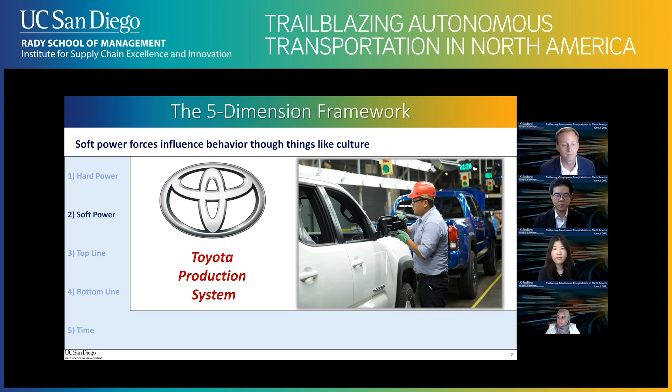The third dimension is top line. Top line forces deal with revenues, for example, the factors that drive vehicle demand. The fourth dimension is bottom line. Bottom line forces deal with supplier capabilities, for example, manufacturing costs.

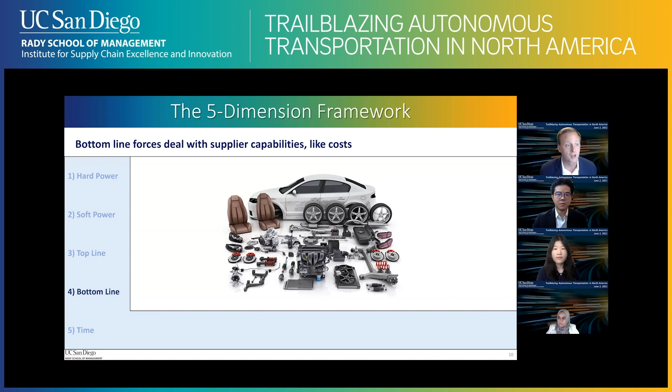Finally, the last dimension is time. Industries are kept in balance by the previously listed forces that drive its direction over time. For example, here, the Ford Model T won market share in the early 20th century by its innovative assembly line operations focused on cutting bottom line costs.

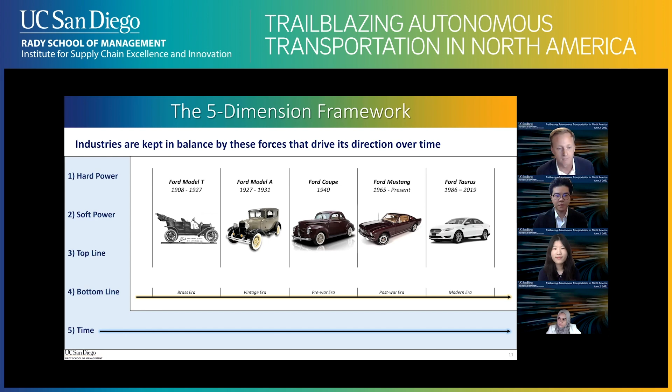As much as we all like the Mustang, it was the Ford Taurus that saved Ford from impending bankruptcy in 1985 as top-line demand shifted from boxy American cars to smaller and more fuel-efficient Japanese import styles. Throughout this entire timeline, eras come and go due in part to the hard and soft power shifts that we experience. This first section of our presentation will focus on the internal combustion engine.

Society has come a long way since the first modern internal combustion engine was invented by Nicolaus Otto in 1876, shown here on the left-hand side of the screen. This technology has grown to some of the most modern internal combustion engines of today, shown on the right, like Infiniti's 2-liter variable compression turbocharged engine.

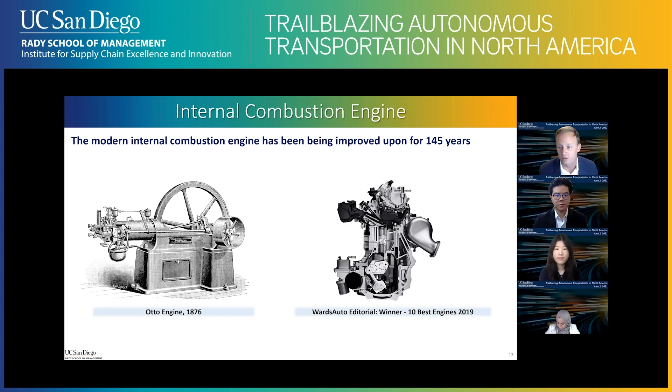There are many factors that brought us from the engine on the left to the engine on the right that powers the automobiles that we know and love today. We view our first factor as hard power. Hard power regulations have aimed to influence consumer and automaker behaviors.

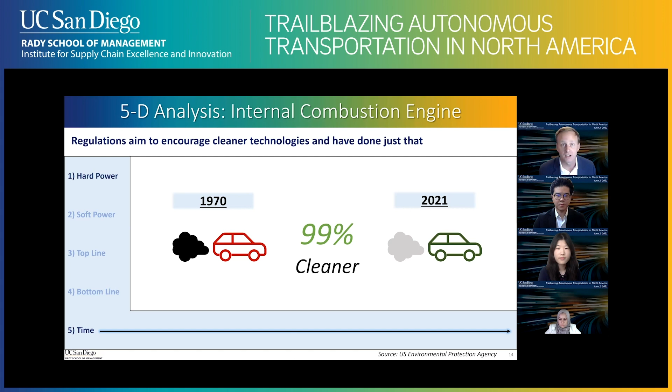The Clean Air Act, passed by Congress in 1970, gave the Environmental Protection Agency the legal authority to regulate pollution from cars by adopting stringent standards. This has resulted in new cars, trucks, and SUVs being 99% cleaner than their 1970 counterparts, according to the EPA. In fact, a substantial jump is evident in just 10 years' time, as demonstrated here.

On the left-hand side of the screen, you will see the 2008 Ford F-150, its engine, and its engine specifications. On the right, we see the 2019 counterpart. Over time, companies like Ford have innovated to produce significantly improved engines powering their most fuel-inefficient vehicles through hard powers like the EPA Clean Air Act.

Over a period of 10 years' time, the F-150 has shifted from a normal V6 engine to their EcoBoost twin-turbo V6. The newer engine has drastically lower displacement, which leads to an increase in fuel efficiency, as shown by these green boxes and lines. Better yet, both horsepower and torque have increased, as shown by these orange boxes.

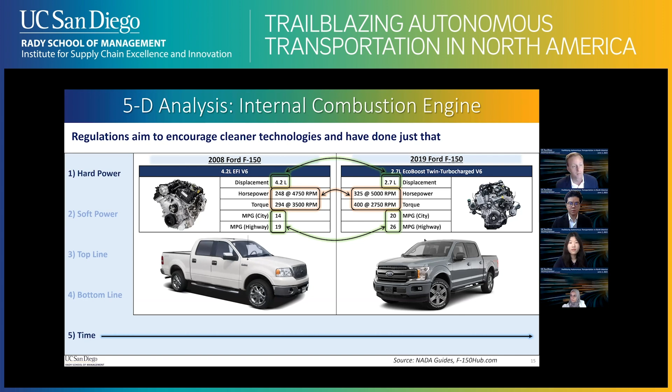In regards to soft power forces driving the automotive industry, companies have curbed their investment in new internal combustion engines, essentially only maintaining this powertrain as a bridge into a more environmentally friendly future. Just this year, as demonstrated in this non-exhaustive list, we see spokespeople from companies across the industry reinforcing that they are withdrawing funding from new internal combustion projects and investing heavily in cleaner technologies. These automakers are just a few, joining the ranks of companies like Toyota and Honda, who stated their planned exit from the internal combustion market in previous years.

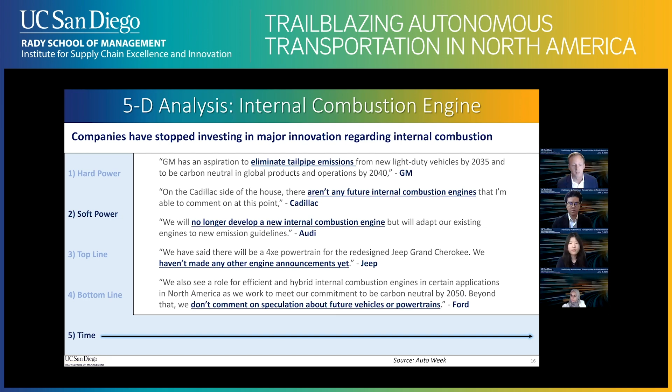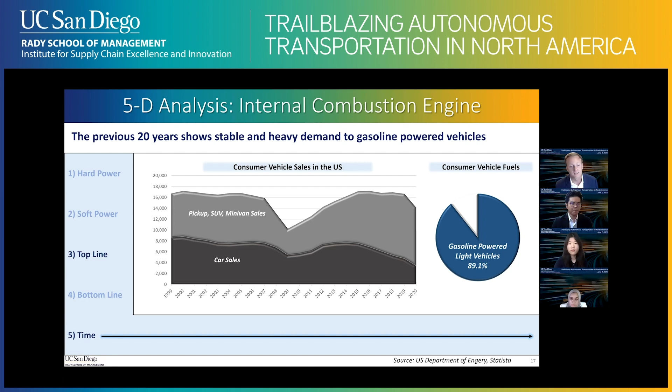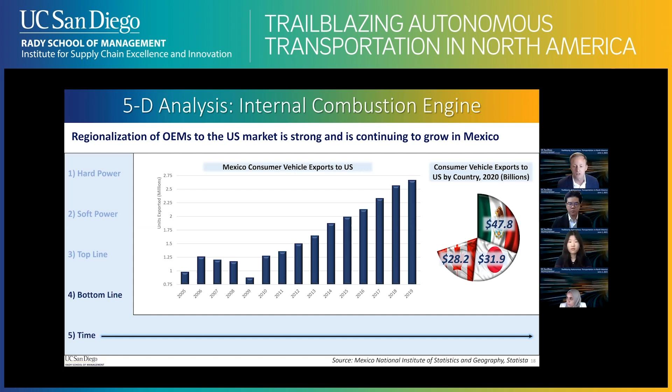I will now turn it over to Nora to walk us through with a detailed look at the EV industry.

Thank you, Dan. In efforts to reduce pollutants and greenhouse gases, alternative or renewable energy sources have shown great promise in helping to reduce the number of toxins that are byproducts of energy use, such as ethanol, natural gas, hydrogen, electricity, propane, and biodiesel. Lots of regulations are emerging in North America to achieve these efforts.

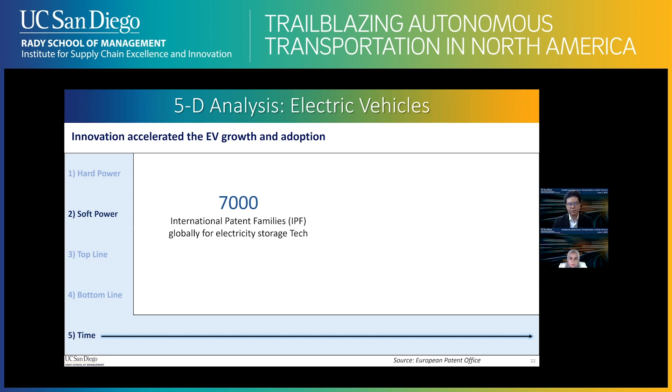In terms of soft power, the innovation in the industry has been on an upward trajectory. There were 7,000 international patent families related to electricity storage published globally in 2018, with an annual growth of 14% between 2005 and 2018, compared with a 3.5% annual growth rate on average for all technology areas. The US has been seeing an increase in filed patents and is right behind South Asian countries and Europe with more than 870 patents in 2018.

The increase in innovation in electricity storage introduced more attractive models to the market that meet the customer's demand and accelerated the adoption of EVs.

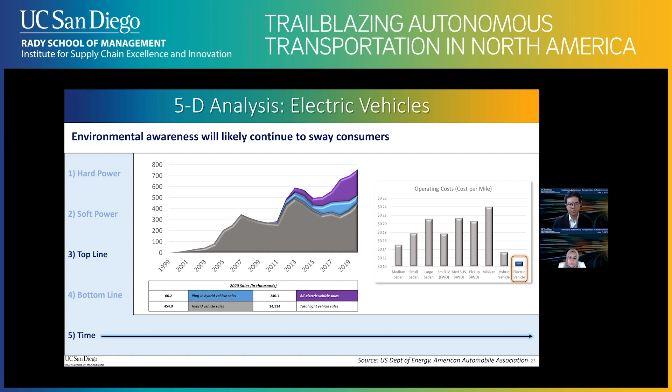On the top line dimension, the graph on the left shows the increase in sales of EVs since 2016. Sales in the US increased by 80% in 2018 alone. Moving to the right side graph, the lower operating cost, which includes the cost of fuel and the cost of maintenance, attracts many customers to the EV regardless of the tag price. The increase in sales was also driven by the fact that manufacturers have been competing in introducing high-performing EVs to the market.

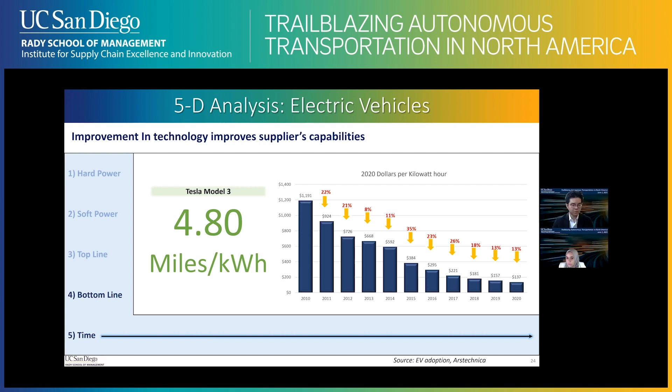The improvement in the supplier's capability, or the bottom line, is driven by the improvement in soft power, and will improve the top line in the long run.

Now, regardless of the growth that we see in the EV industry, there are challenges that need to be addressed. Based on our research and interviews with experts in the industry, we highlighted three main challenges: batteries, cost, and infrastructure.

Starting with batteries, one crucial challenge is that cell demand growth is outweighing cell supply. Automakers are now competing for a limited supply of cells. We need to scale up production, which means more raw materials, skilled talent, machines to extract raw materials, and factories to process these raw materials.

In terms of cost, raw material mining cost is a challenge. Lots of auto manufacturers are investing in battery technologies, however bringing the whole process locally is costly. Today, battery technology is dominated by lithium and nickel. The issue with lithium is economic shortage, meaning lithium prices don't support the mining investment required to get it out of the ground profitably. As for nickel, the challenge is in the refinement process, which is cheaper in Asia than in North America or Europe.

Lastly, in terms of infrastructure, charging station availability and grid capacity is a huge challenge. EV sales continue to increase, but EV adoption varies by region, which means planning of charging station demand and upgrading the grid is determined at the local distribution level.

Now, given these challenges, we are still seeing and will be seeing more growth in the industry. With the addition of future technologies, the transformation of the industry is promising. Now I will leave you with Jeremy to share more details about autonomous technologies.

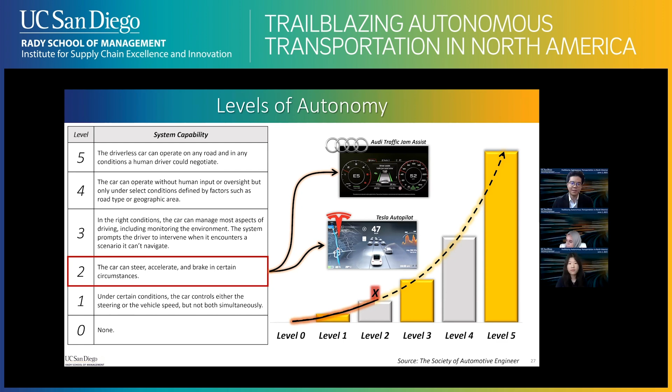Thanks, Nora. For autonomous vehicles, in terms of regulation, the Society of Automotive Engineers defined 6 levels of driving automation, ranging from 0 to 5. These levels have been adopted by the US Department of Transportation, and we're currently at level 2. Examples of the current level include Tesla Autopilot and Audi Traffic Jam Assist.

The autonomous technology has been through 40 years of development. Here are a few milestones that have brought us to where we are today. In 2012, the Google Driverless Car project brought autonomous from lab to commercial. In the years since, Google has developed and tested a fleet of cars and initiated campaigns to demonstrate applications of the technology, for example videos highlighting mobility offered to the blind. Later on, Audi and Toyota both unveiled their AV visions in research programs.

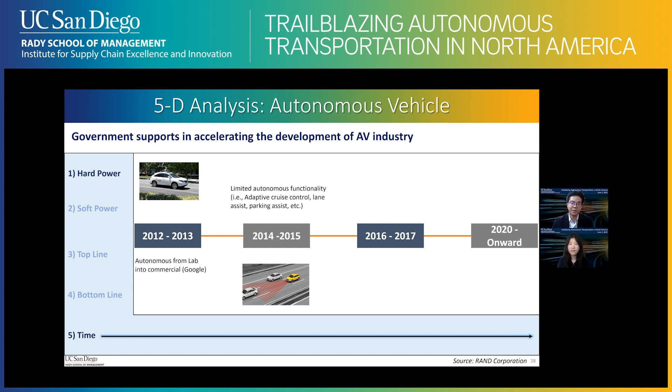During 2014 to 2015, many contemporary car models offered features of limited autonomous functionality, including adaptive cruise control, lane assist, and parking assist. On the government side, in January 2016, the US government unveiled a new policy with a commitment of nearly $4 billion over the next 10 years to accelerate the development and adoption of safe vehicle automation. So far, 50 states have introduced state autonomous vehicle legislation.

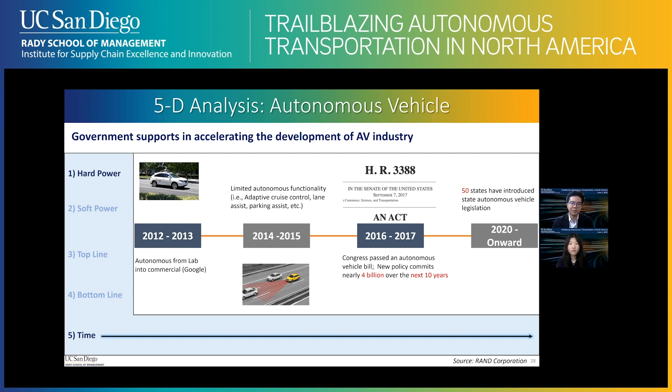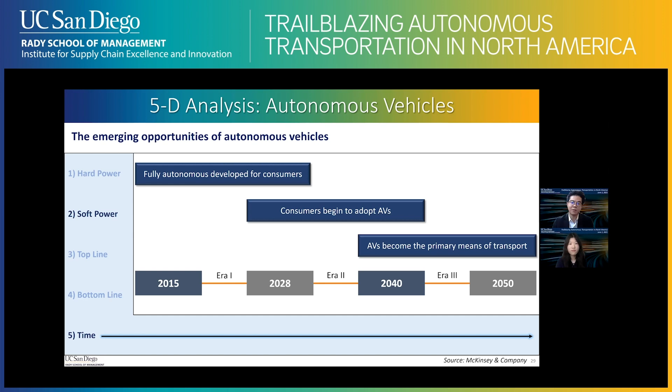On-highway trucks will likely be the first vehicles to feature full technology on public roads, as companies are currently developing the software algorithms needed to handle complex driving situations. Based on our research, the autonomous driving market size will grow from $8 billion in 2016 to $26 billion in 2025. According to the survey, safety, lower fuel, and insurance costs were the top reasons many consumers showed interest in autonomous vehicles. As good as it sounds, cybersecurity and liability are the top concerns for many consumers.

From the supplier side, the B2B market for assistive and autonomous technology, which includes software, hardware, and services sold by suppliers to automakers, promises to be attractive, even in pessimistic scenarios.

The number of autonomous vehicles is likely to remain small for the next 5 to 10 years, even in the most receptive markets. But we do see some opportunities from bottom line. Waymo, GM Cruise, and Uber plan to launch commercial services with autonomous vehicles on a controlled basis. Larger scale driverless services are further off, but investors are betting the shift will come sooner rather than later.

From the bottom line, if we look at the customer cost per mile back in 2019, it ranges from $0.3 per mile for using public transportation to $3.8 per mile for riding with taxi. Ride hail, car sharing, and private vehicle fall between that range. In the future, the customer cost per mile of a robotaxi will be lower than the cost of most other current mobility solutions, ranging from $0.6 to $1.5 per mile.

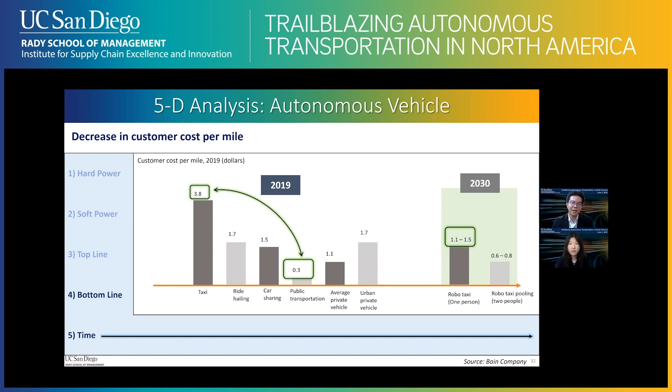So in the near future, autonomous technology will bring us to another level of mobility solutions. And I will pass to my colleague Susan to share more insights on shared mobility and how it will impact our life. Thank you, Jeremy.

We're seeing an increasing number of people moving away from the traditional car ownership model and benefiting from many different mobility services, including ride sourcing like Uber and Lyft, public transit including buses and potentially robotaxi in the future, ride sharing and carpooling, and even the rise of micromobility like scooters.

In the past, getting a car symbolized having freedom. While it still does, we're seeing young adults delaying or not even getting a driver's license. The rate has dropped from 46% to 26% over the last 40 years.

While surveying why young adults are not getting licensed, they quote factors including having a car is too expensive, or that they have the capability to travel through other means, such as public transportation and biking. The combined technology development and the cultural shift has increased the role shared mobility plays.

In this section, we will look at how the overall value supply chain in the auto industry has evolved.

So let's talk a little bit about what goes into an autonomous robot. The first is a great parallel to a human system, because humans are autonomous, right? So first, vehicles need sensor systems. Humans use our eyes, our ears, we have motion sensing in our inner ear. The ability to sense the world around you is really important.

The second is you need computation—the ability to interpret all of that information about the world, classify it, make predictions about how the world is going to evolve over the next few moments, and make decisions about what you want to do next. Then the way you act on those decisions is through actuators, which can be hydraulic or mechanical actuators in a vehicle, or for humans, obviously, our muscles.

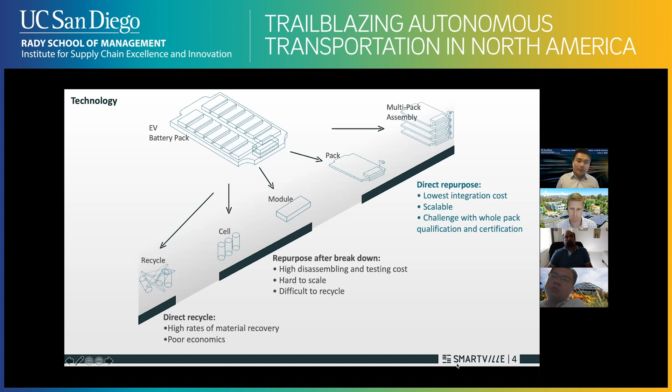But at the same time, it gives an opportunity to aggregate retired electric vehicles at large scale. At the end of their life cycle, we can also sort through them and provide them as a material stream for recycling. So one of the technology solutions we're looking at is to build a distributed hub.

Those hubs can be located anywhere with high EV populations, and we populate those hub facilities to interconnect with the grid. We provide a collection and integration platform for multiple EV makers and models, and we can integrate the battery solutions in those hubs to provide grid energy storage services. Meanwhile, we can qualify those batteries based on their performance, reliability, safety, and consistency, and create a second-use product for commercial and industrial business.

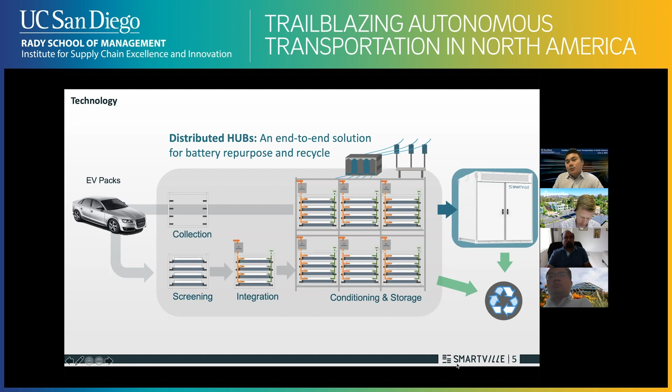And at the end of the day, those hubs can be populated to solve one link of the logistics problem and help aggregate large amounts of batteries, eventually feeding into the stockpile of battery recycling. So with that, I think it's a good transition to Dr. Chen.

Okay, thank you Antonio, and thank you everyone. I'm very glad to speak in this symposium. My name is Zheng Chen. I'm an assistant professor in the NanoEngineering department and the program of Chemical Engineering and Materials Science and Engineering at UC San Diego. I'm going to go very quickly because I was only allowed 2 minutes to introduce the supply chain issues.

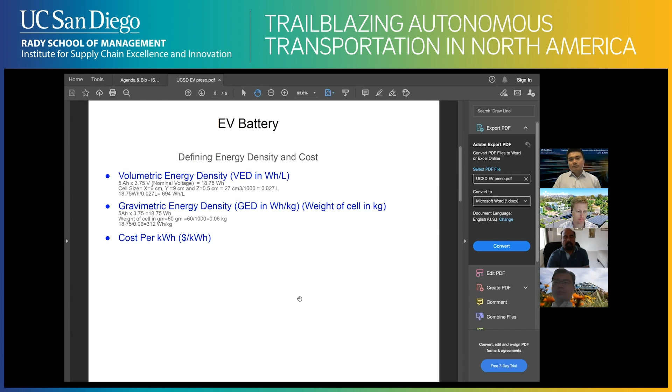Next slide, this is gravimetric energy density in watt hour per kilogram. So how are we advancing? In about 2013, we were at about 154 watt hour per kilogram. By 2024, we will be at 400 watt hour. So it's a significant increase in how much energy we can put in a 1 kilogram weight.

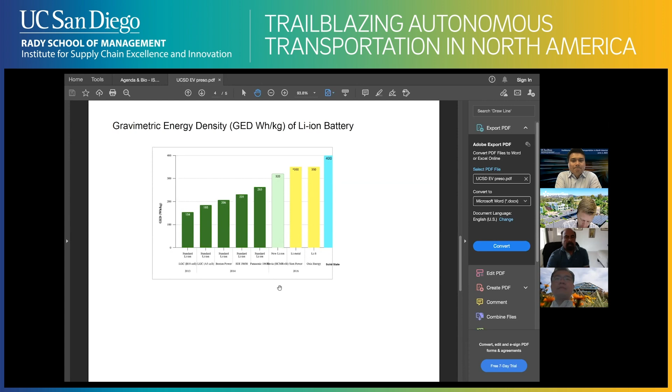And that's where it's going to start making a big difference, because there won't be a cost difference in the cars. So EV probably will take off from there. Right now, the majority of the cost is going into the battery. I think the battery today costs anywhere from $7,000 to $10,000. If the cost per kilowatt hour comes down, and by 2024, 2025 we reach anywhere around $70, $75 a kilowatt hour, we compete very heavily with the gasoline engine car. That's where I believe we will start taking off in terms of EV, because there is no cost difference. There are other things that have to come into play, like charging stations. Like you have a gas station everywhere, so people don't worry about it. Charging stations are going to be critical.

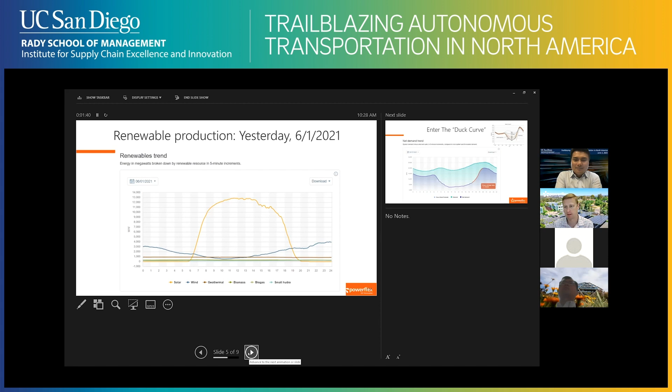But the beauty is you have a very flexible demand function with electric vehicle charging. Some of you may be familiar with this curve called the duck curve. What it shows is after you take out the demand on the electricity grid in California, when you take that solar curve, invert it, and carve it out of that demand curve, you end up with a curve that looks like a duck. It talks like a duck and it walks like a duck.

And it's a really hard problem because as the sun begins to shine, you have to ramp down natural gas resources. As the sun begins to set, you have to ramp those natural gas resources back up. Some of that can be solved with a battery, and we're continuing down that pathway, but it's not the end all be all.

We have to really start converging towards pushing EV charging into the daytime, in California in particular. When we have 5 million electric vehicles, which in theory, from a nameplate standpoint, if they all plugged into a level 2 charger, it would provide 35 gigawatts of power - that's about twice as much as the entire electricity grid. But from an energy standpoint, it's only about 10% of the overall energy consumption on the California grid.

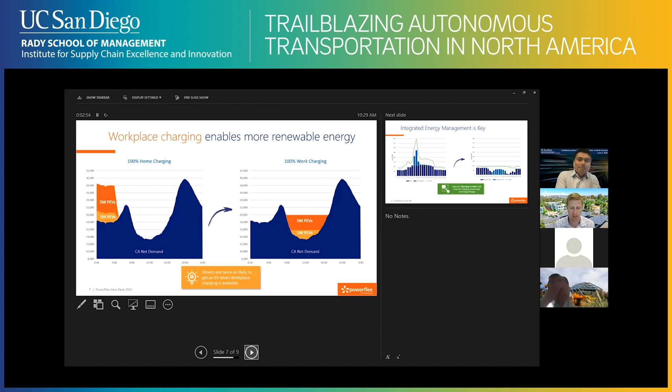So we really have to be cognizant of how we can incorporate and integrate solar, storage, and EV charging. You can see that in the project right behind me at our offices in San Diego, where we have 400 kW of solar, 43 EV charging stations, and a battery. This is actually our load data where we're able to level load all of the energy and power so that we're not negatively impacting the grid.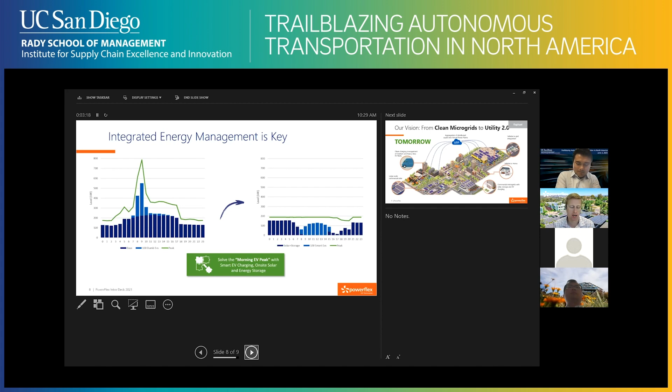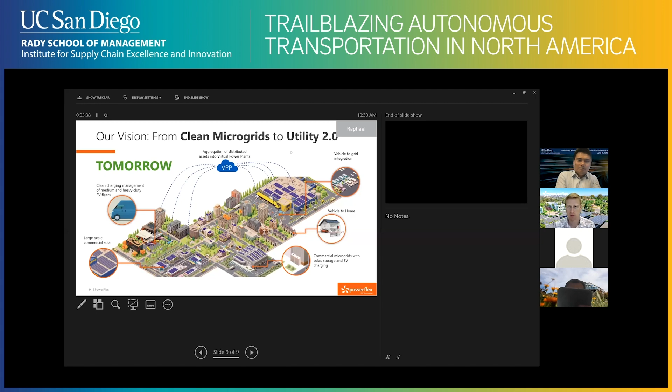Ultimately, this turns into a virtual power plant, microgrid distributed assets that allow, if power is needed on one side, we can distribute that, whether that's through V2G - vehicle to grid, vehicle to home - and regular smart charging as well. So I'll stop at that point and thank you.

So let's move on to a few questions that we have for the panelists. I'll start with the first one: Do you guys think the US battery supply chain, or lack of it, is limiting EV growth?

I think we have a pretty good situation - at least Tesla has done extremely well in terms of managing the battery supply within the country.

Still they struggle because most of their partnership is Panasonic. There is a cultural problem going on. Japanese basically works very slow, Americans want to work very fast. That probably is the issue right now, where the gigafactory of Tesla is not working fully because they are extremely careful in terms of safety and reliability, and their chain of command means for small stuff they have to go and take permission from the highest level. We want to go very fast, right? That's why the gigafactory is not working the way it is working right now. But once that gets resolved, I think we will not have an issue of batteries in this country, in my mind.